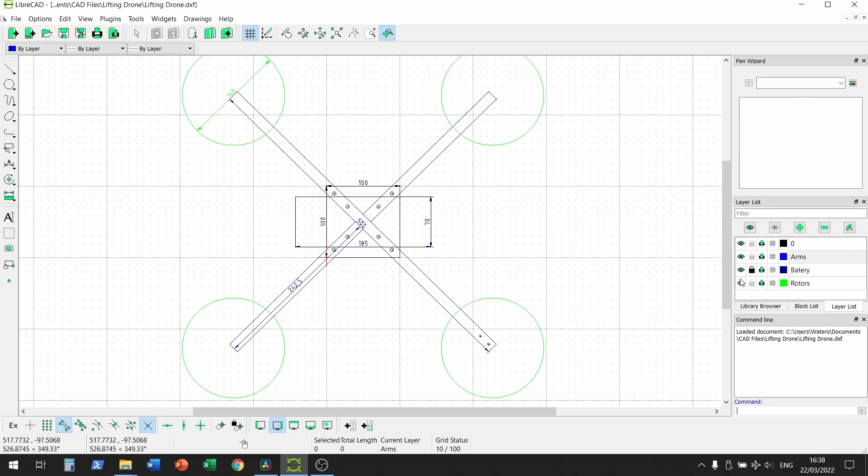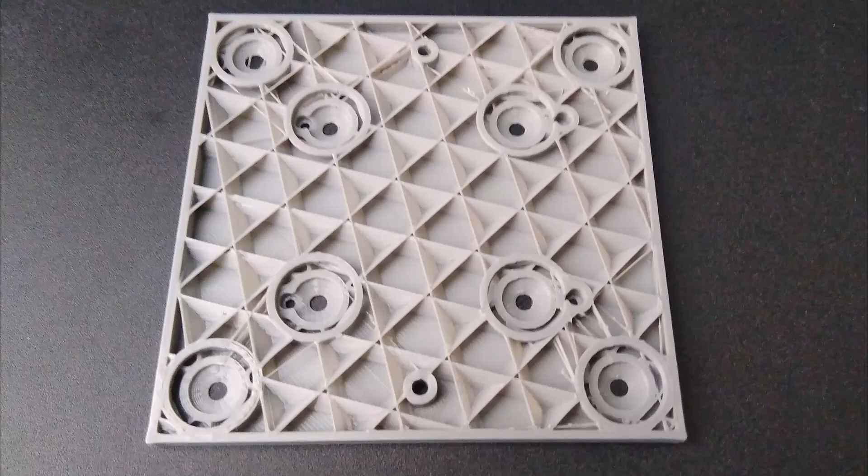Then I actually built the frame and tested it to make sure it wasn't going to bend excessively. Then I needed the 3D printed mount for the flight computer. Then I made some feet by cutting some 15mm aluminium extrusion and sticking it in a 3D printed foot.

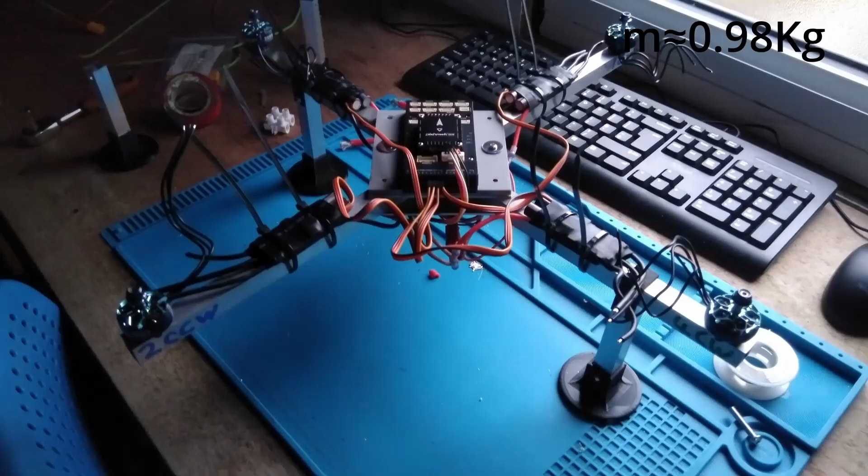I went with the Quad X layout, and then I started mounting everything. Then weighed it. 0.98 kilos.

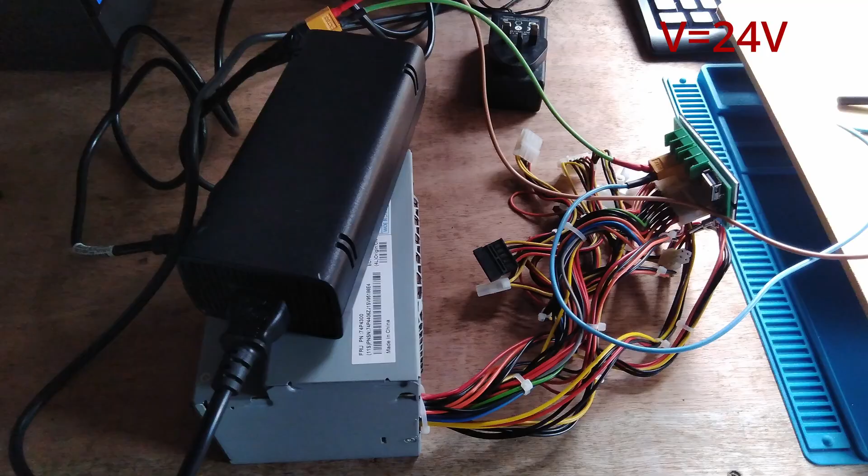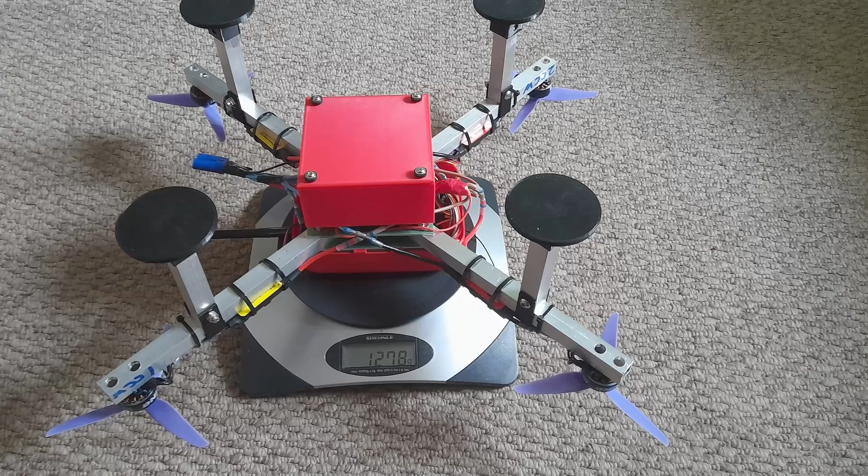Then this is the mess of power supplies I used in series to get 24 volts for testing, and here's it with the lid on. And then 5-inch props for testing, and a total weight of 1.278 kilos. And this is the first successful flight footage.

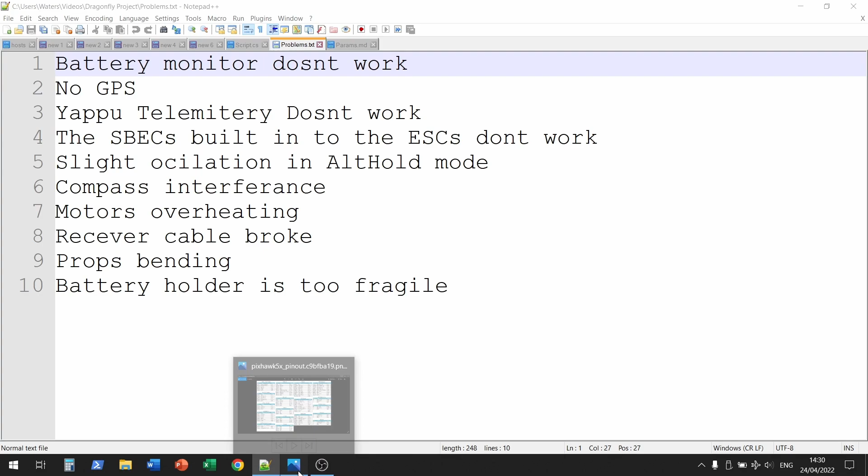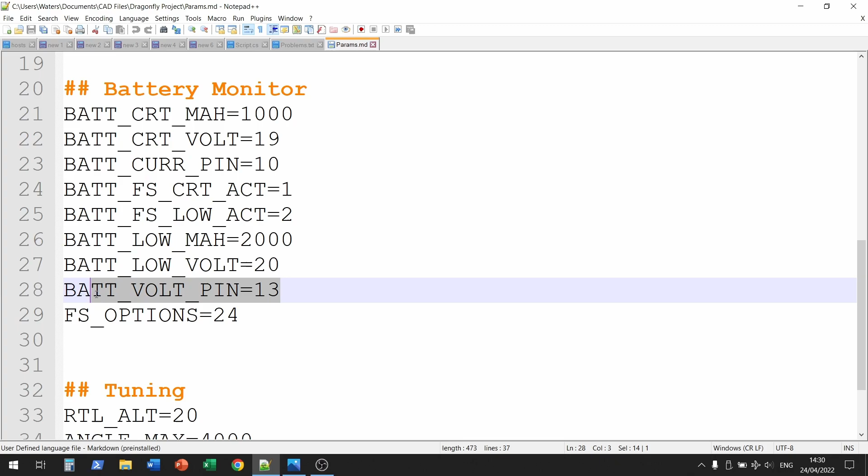The first problem found from the testing was that the battery monitor doesn't work. This was found to be because the power input ports are an I2C bus and my power monitor is analog. So I eventually found I could fix this problem by using the analog to digital converters in the AD&IO port. I just need to do some soldering and then change some parameters for battery current pin and battery volt pin, as well as all the other configuration for the battery monitor and a few other battery related parameter changes such as fail-safe options.

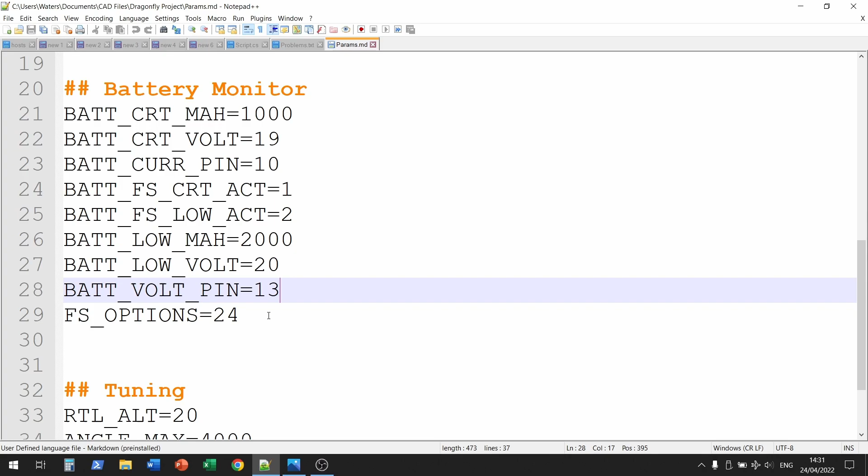Problem 2, no GPS. That was an easy fix, I just didn't have one installed. Then problem 3, Yappu telemetry on the controller not working. I found multiple reasons that wasn't working. Firstly, I had it connected to RSSI because the schematics seem to make that make sense, when in reality it wants to be connected to the TX of a serial port. So I ended up using TX on telemetry 2.

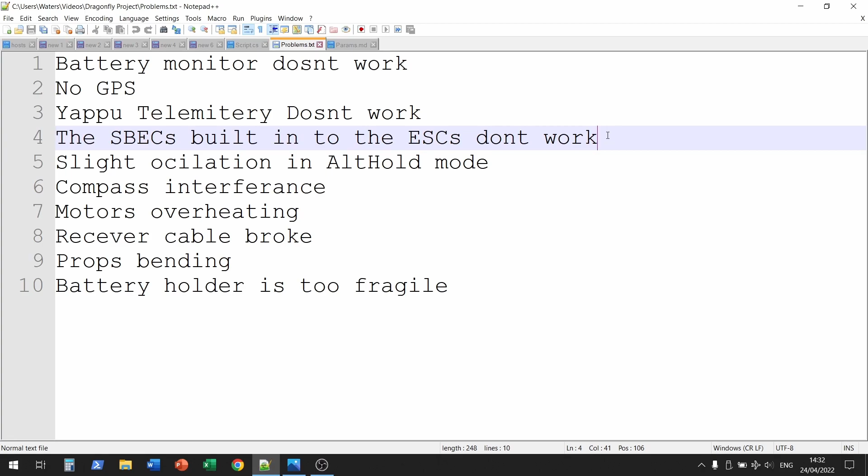Then I needed to set up some parameters for that as well. Serial 2 protocol equals 10, serial 2 options equals 7. And I also needed to flash my radio with Lua enabled and copy the relevant SD card contents to the SD card. Problem 4, the SBECs built into the ESCs, it's not working. That I haven't got to the bottom of yet, but it isn't flight critical. They're only used for the backup power for the flight computer and eventually the gripper servo.

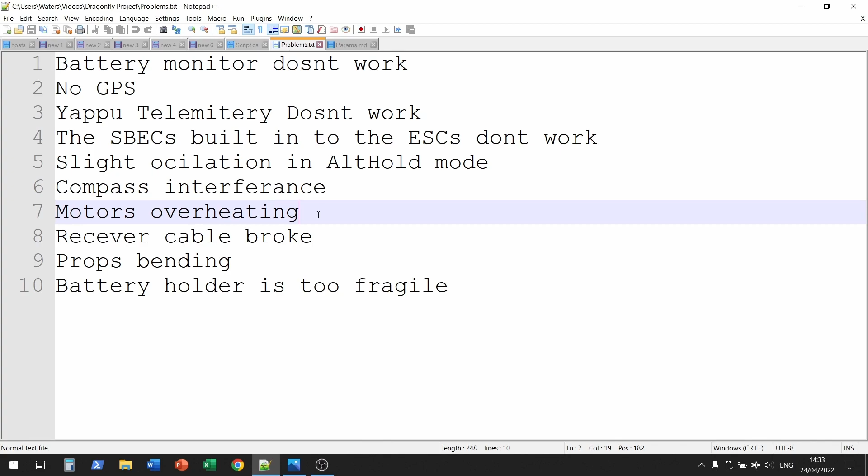The slight oscillation in alt-hold mode was fixed easily with some basic tuning. The compass interference problem was mostly mitigated by the external compass in the GPS, but we'll need a compass motor calibration to properly fix. And the motor overheating problem, the motors burning out, ended up being a big thing. So I first thought I'd change from the 2755 kV motors to the 1855 kV variant and change the props from 3 blades to 2. And that made an improvement, but it still wasn't enough, and I got another motor burnt out. So I ended up having to go with bigger motors still and the 8-inch props instead of 6-inch to completely fix that problem.

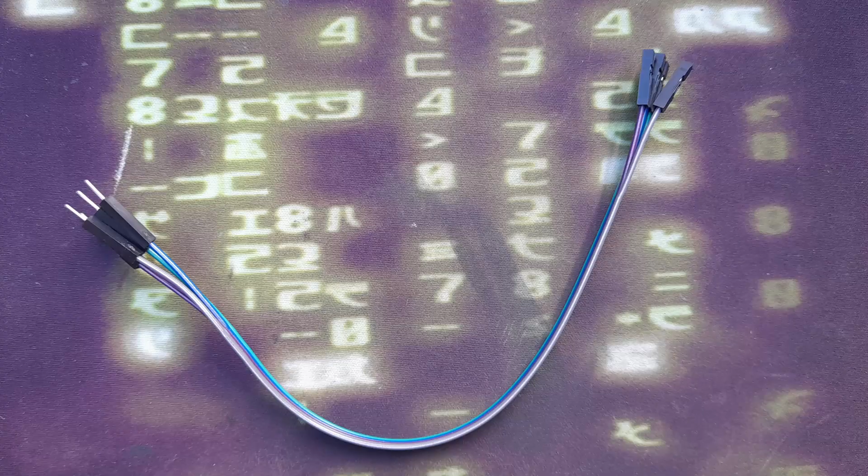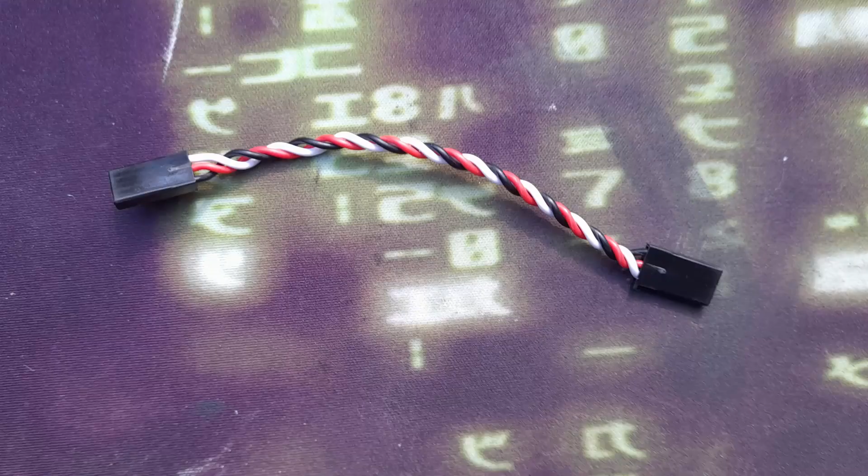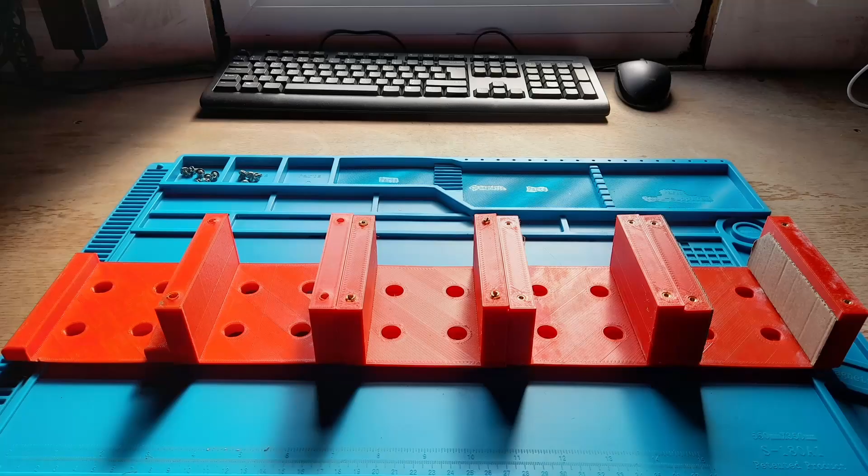Another problem I had was that the receiver cable was a cheap pinheader cable intended for prototyping and isn't any good on a drone because the insulation's too brittle. So that was an easy fix, it just needed to be replaced with a cable with silicone insulation. Propeller bending was fixed with the 8-inch carbon fibre reinforced props. And the battery holder being too fragile, well, that ended up being a dead-end design and I needed to change it to a simpler design with Velcro.